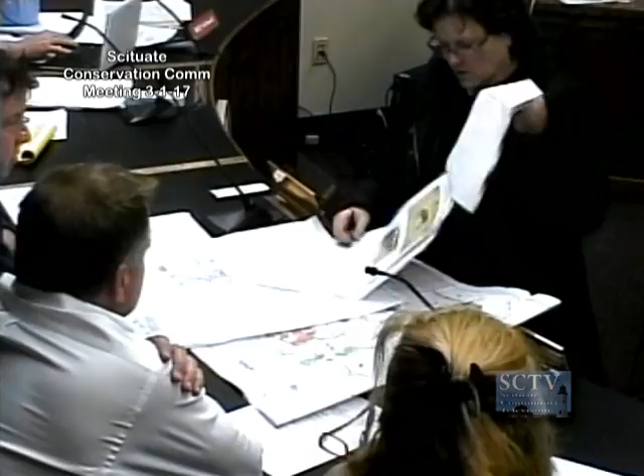What kind of fence are you thinking? It would look like a farm fence, something like this, or more simple like that. I've done this before and they're not very visible compared to other fences - you can just see the posts, and the mesh is a bit bigger, maybe about that size. It's not barbed wire, there's no electric, it's just open.

So the work that she's proposing is in between the 100 and the 50 foot line, in between the wetland and the 50. In the 50, there's a big ledge outcrop, so the house is up on top of that ledge outcrop right now, and then that goes to the back.

As Pat points out, this was a site that somebody used for dumping fill and concrete and a bunch of stuff. Are you going to eventually clean that out of there? That's what I'm hoping you approve too. I assumed that was the case, but I'm here because I want to make sure I do the right thing. If there's that debris, I'd like to be able to clean it up.

So there's no place else to put the shed, right, given the fact that it's going to be within this area on the ledge? Well, Frank, where does the ledge end on this? It sweeps down and continues back here, and it's probably all along here, and it comes up all around. So this is the house on top of ledge.

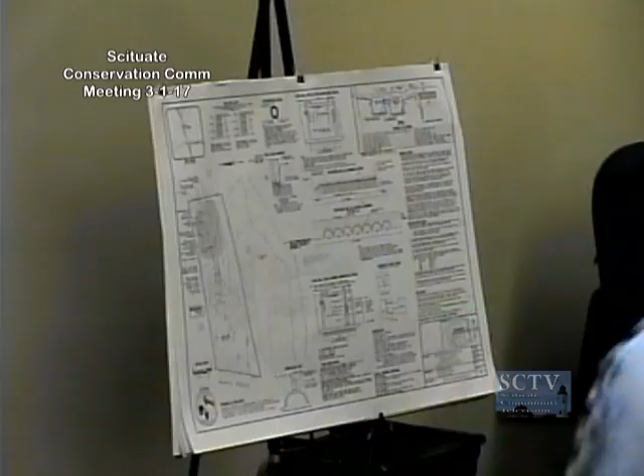This riverfront standard, 10.58, exempts septic system upgrade projects where you're not proposing an increase in flow.

I'll mention as well that river is a tributary to the town's drinking water supply. As such, per Title V, it has a 200-foot setback referred to as a Zone A. The Board of Health can waive that requirement down to a 100-foot setback in repair scenarios where systems exist within that Zone A. We've asked for that exemption.

The system is located outside of 100 feet, but it is within that 200-foot setback. Again, that's applicable under the Board of Health Title V regulations.

Wetlands Protection Act-wise, the regulations basically make a presumption that any system that's an upgrade, not associated with new flow, if located outside the 50-foot buffer zone, is presumed to protect all of the interests of the Wetlands Protection Act. That's the case that is met here.

It's outside the 50-foot buffer zone. We have appropriate erosion controls in place, and it's an upgrade with new construction standards applied.

Greg, has the Board of Health ruled on your request yet? No, it's currently under review with them. Okay, thanks. So we'd be looking for a determination pending their review.

When, yeah, right, yeah, okay.

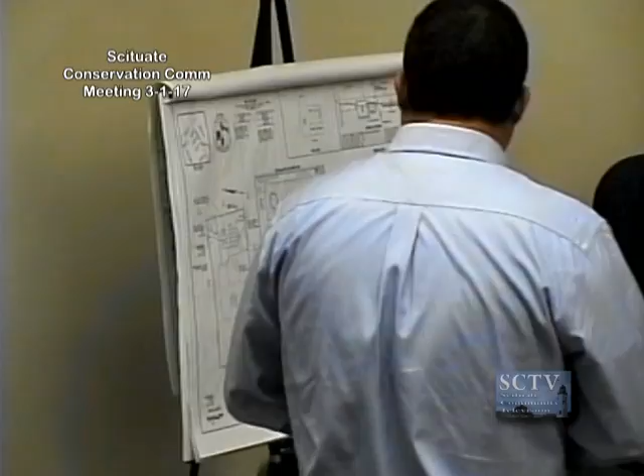We're not proposing to change the grades in this backyard. We're not affecting any flood storage capacity. We're not diverting stormwater in any direction where it doesn't currently go. Again, this is a septic system upgrade. It was an NOI because of the fact we're inside that resource area.

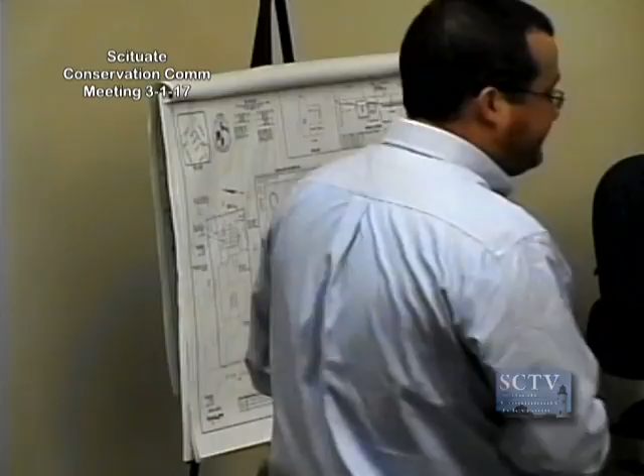Bill, you want to jump or you want to? No, what is the system that's being proposed, Greg? Just a quick overview of it.

The septic system proposed is a 1,500-gallon septic tank, a distribution box, and then a series of chambers, 4 wide by 5 long. They're plastic infiltrator chambers.

Doesn't a tank have to comply to different standards in an AE zone? Does it have to be anchored or something? In the velocity zone, it's supposed to be raised above the velocity zone if possible, or have additional weight attached to it as well.

Thank you. I'm all right. Looks good. Lisa? What size tank is in there now?

What's there now is just a cesspool. Okay, where are you with BOH on this?

Sorry, Matt. No, don't be, that was my next question. Go ahead. Oh, sorry.

It's pending their approval. As long as the grade stays the same, I don't have a problem with it.

Pat said he spoke with Jen. There were revisions to the plan, and she doesn't think there's going to be any issues. I think it's an upgrade, we should go ahead with it.

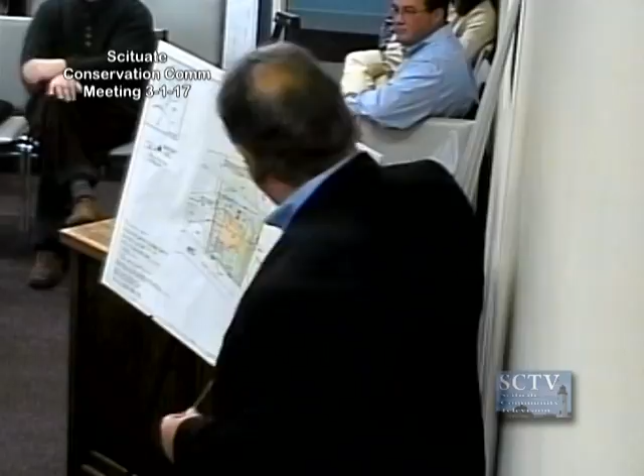This is the site plan that we submitted with the application. The yellow line represents the perimeter of the property. It is bordered by Scituate Harbor to the north.

There's a coastal bordering vegetated wetland just in from the rear of the property, shown in pink, with a 50-foot buffer and 100-foot buffer to it. The FEMA flood zone is an AE zone, elevation 15, shown as a blue line.

The portion of the main house is uphill, here is a first floor above the lower level of the house. And this is also a patio, which is below the first floor of the house, just above elevation 15 as well.

There are existing gravel driveways to the existing garages in this area, and one other gravel driveway goes all the way down into this area. These driveways will be eliminated, and it's proposed to have a garage in the front of the house, which will have some pavement, with the small circular drive as pervious surface.

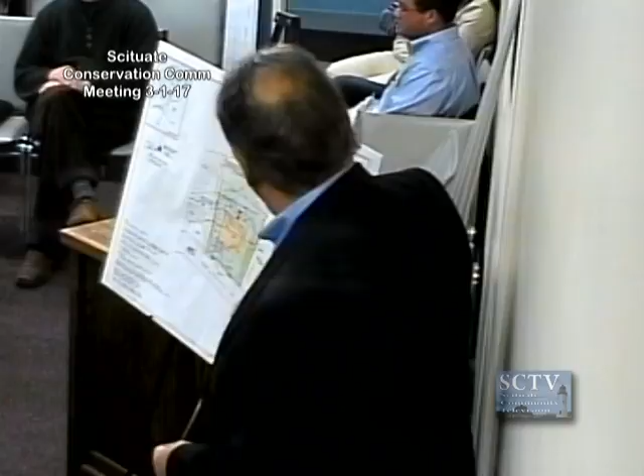In the lawn area, we're proposing a series of plantings, which we show the quantity and type of on the plan as well.

The work that's in the resource area is in land subject to coastal storm flowage. None of the work we're doing here would have any impact on this resource area, which is a bordering coastal wetland up below the salt marsh. These plantings are similar to what we put on this property when this house was newly constructed about 7 or 8 years ago.

There is no stormwater work being presented because the increase is less than 25%. I spoke to Beth this afternoon, and I've got some plans to hand out to you that explain those numbers.

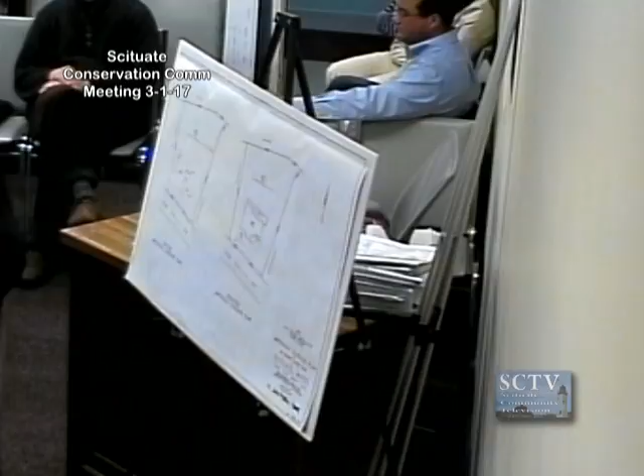There's two plans in here, one shows the... look up on that thing, Bill, what's the one? There's two plans that show the impervious coverage and the calculations we arrived at. You got one right here, too. Yeah, oh, thank you. We'll take a look at the top one, which is this one.

On the left side of the plan, we show you the impervious area. You'll notice that the gravel driveway to the right side of the house is not shown here. There were some balconies taken off because they were not impervious, and there's a gravel driveway in this area that we took off. This plan represents the impervious areas we used to calculate the existing impervious area.

This is the proposed impervious area. It shows that portion of the driveway in front of the garage, and a portion of the house that would be impervious. That number is slightly less than this one, and that's how we came up with the 24.5%.

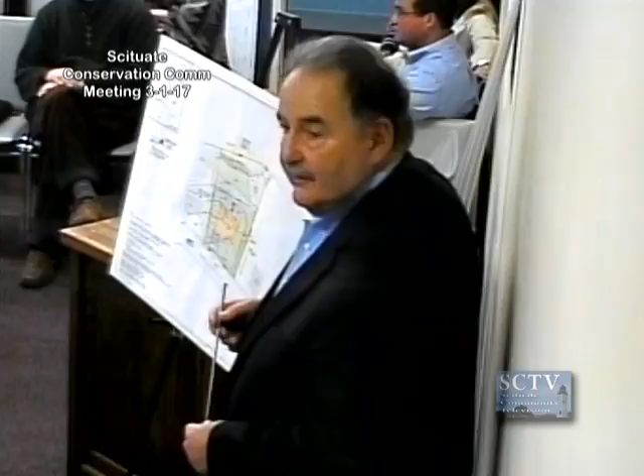That's shown as a blue area on the plan. There's a portion in front of the garage bay, and then strips going around the side - those are all pavers. Yes, and these strips will be about that wide, just for the tires, just tire tracks. Everything else will be lawn.

So, Frank, just so I have this - you can theoretically add as many pervious pavers to an area, and that still would not add to the stormwater calculation? For the stormwater calculations, they're not counted. It's a 25% increase of impervious that triggers it. So no matter how many pervious pavers you have, that still does not count as impervious.

Take the word paver away - pervious versus impervious is basically black and white. You might theorize that a 6x6 square is impervious, but the way it's installed, it's still runoff, it isn't. You know, if you have an asphalt surface or concrete surface, something totally solid, that water has to shed off of it. But with these pieces, because the water can drain down around them, it's considered pervious.

Okay, well, we're on the same subject - that's only for the stormwater calculation. Right, there's whole wetland stuff that's very different than that.

Okay, and sticking to the same subject - decks are not included as pervious surfaces? Decks that are open... I think the reason they show this area here, there's a proposed deck, but it's impervious underneath because there's a concrete patio below it. So a deck would be pervious, an open deck. It would be impervious if it had a roof, like a porch - pervious, yeah.

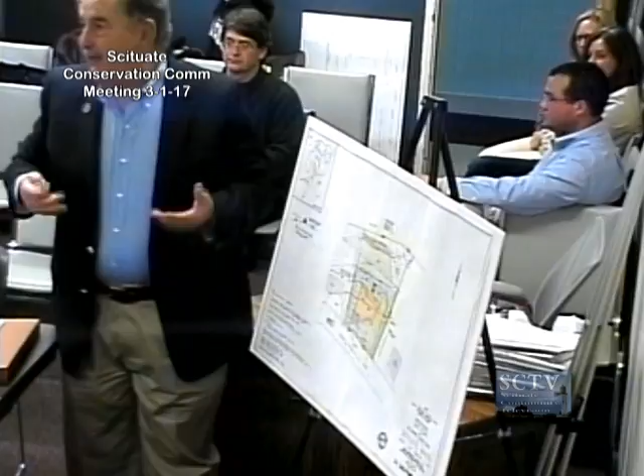This is all in the VE zone? No, no, it's in Zone X. This is X, before you even head down Edward Foster Road. You're right on the line too, Paul, with the A zone, right at the edge of the structure there. This line does not go through the house, it's going through the patio down below. But what we did was pick that lower level up, so it is above 15 for obvious reasons. This is the area he's talking about, making impervious.

Weren't we looking for FEMA to define X zones further? No, it's a different situation. It's the LiMWA, and there may be a LiMWA at the base of this property.

And I believe the applicant said you don't have a problem with the cobbles where the driveway is? That's fine, pavers. And just for the record, pavers - you're William G. McKelvey, correct? Pavers, yes. Okay, that'd be helpful.

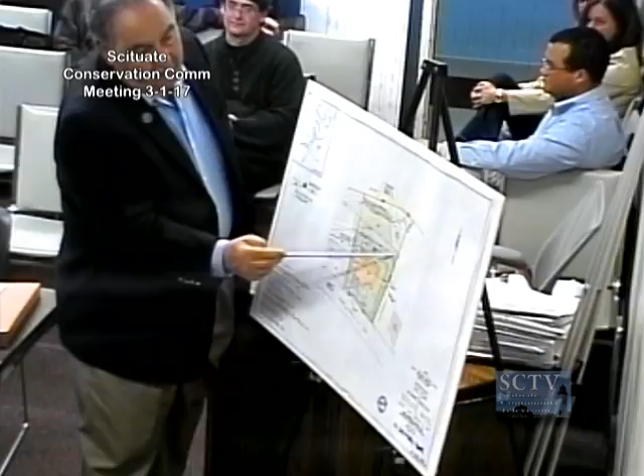Can you show where they're getting rid of the 50-foot concrete buffer here, and putting in the lawn, going permeable pavers down to the salt marsh, the whole thing? This is the resource area, which is actually in the line. This is a 50-foot buffer. The second page line is a 100-foot buffer from here.

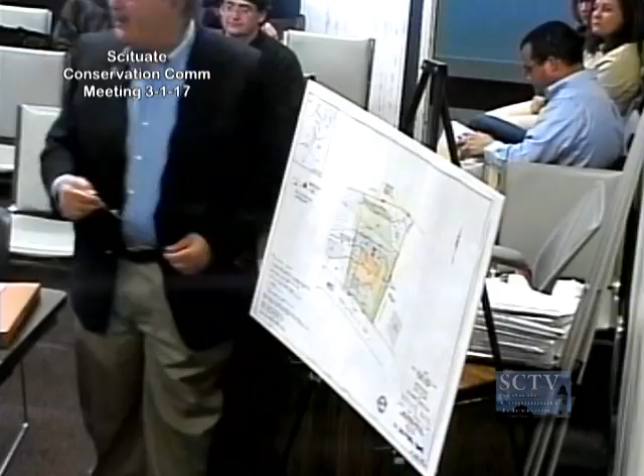So you're showing absolutely no work in the 50? None, zero - to the 50, yeah, there's a small corner of pavers, which is why I asked for the pavers on the other side. This is all maintained lawn at the present time, and has been for decades. This was the former property of Minnie and Doherty, and their son was there - they sold and moved out of state.

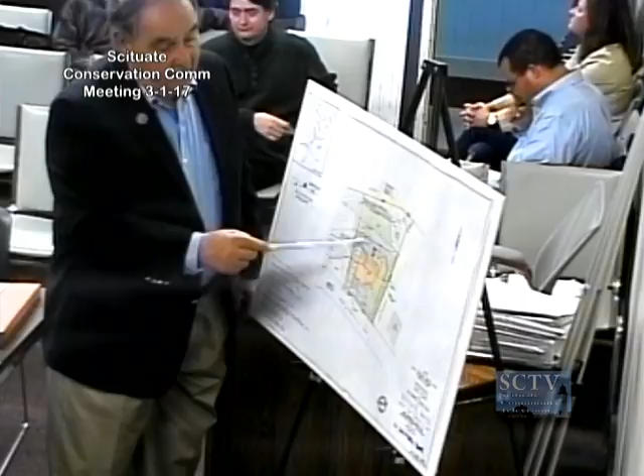So the two areas of proposed permeable pavers, you said cars are going on top of those? If you drive down here, he can park the cars here if he does work - pull in, drive in like it was a basement. If it were lawn area, it'd just get dug up and you'd have erosion problems going down. So pervious pavers will stabilize the soil and let the water go through it, without causing erosion problems. Okay, thank you.

If the impervious driveway is going to be replaced with pavers - yeah, it's all pervious pavers. That's a good start, I think. Paul, you could just give us the calculations on changing that area from impervious to pervious, right?

Is the town floodplain district at the far edge of that property there? It's a 10-foot contour, which is down here, near the silt sock line. So there's a silt sock here, just to stay away from, but we're not doing any work there, no grading or anything. The one thing is, there's proposed plantings out there, and we're all for proposed plantings, we'd have to run that by zoning to make sure that's the right type. Really?

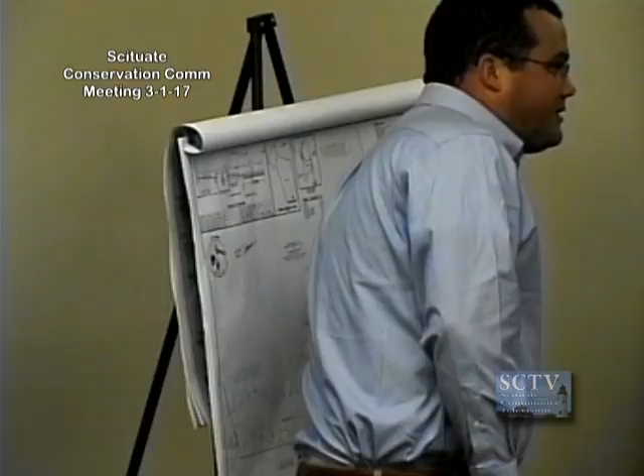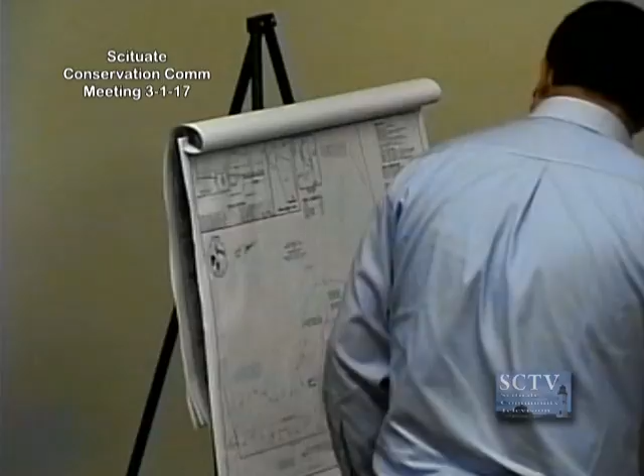It does not come onto the property. Further back, that brook expands. At that expansion location, the map references the 100-foot contour with respect to mean sea level. Our elevations here are all with respect to mean sea level. The lowest elevation at our site, which we shot, was elevation 108 in this lower corner. We're out of it with respect to the distance to the culvert as well as elevationally, as confirmed by Mr. Duggan.

So none of these parameters you described change given the fact that we're dealing with a tributary? No, a tributary is not regulated in the floodplain and watershed protection district. The tributary is referenced in the water resource protection district.

Thank you very much. Richard? I'll move on for now. No questions. Lisa?

These different setbacks you're referencing qualify this as one lot, correct? Okay. So if you were to come back and revisit us for lot two, okay, very good, reanalyze. Yes, thank you. Matt? I don't have anything.

Pat? I think at this point there's a couple of things we need to verify. When the Board of Health makes their review on the septic system, if they change the location at all, that could change the distance of the tributary. So we want to make sure that anything to do with septic stays 200 feet from the tributary, under Mass DEP and Title V. They're not done with their review. I talked to Greg about going out and taking a tape, and these things are really tight, like 201 feet from the tributary. So we need to check it once the septic location is finalized. I assume Board of Health is getting close on that.

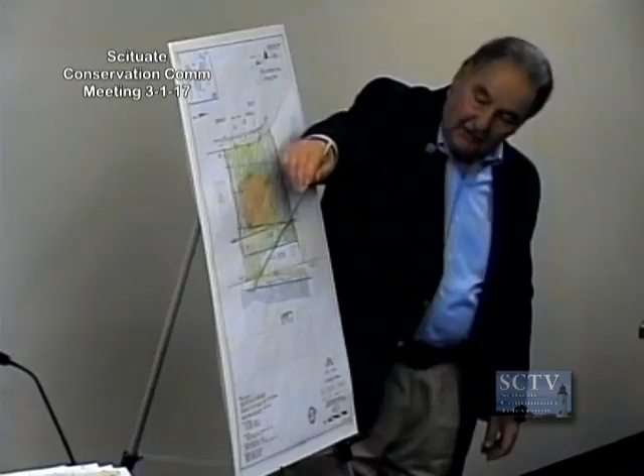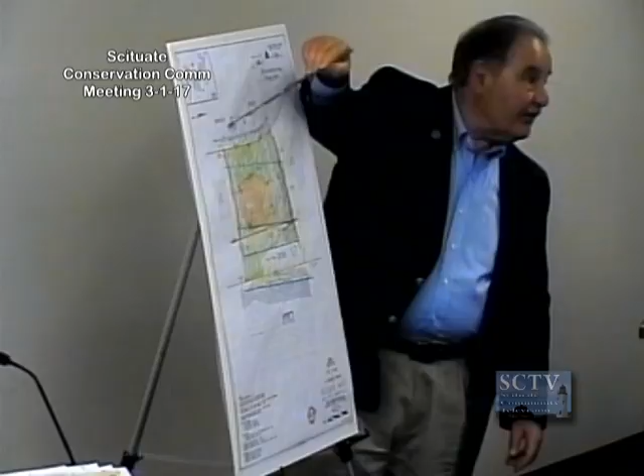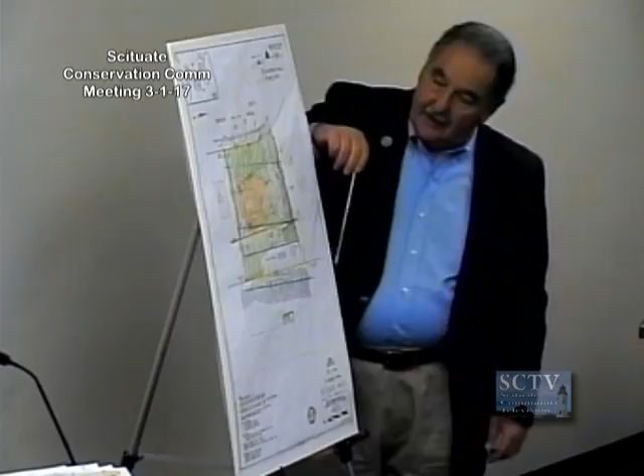On this proposal, we would keep the existing driveway that's shown in this area here. It actually goes all the way to the edge of the lawn, but this portion of the driveway would be eliminated. There'd be a small retaining wall to contain the grading of the lot in this location. And the house would be built closer to the street, further away from the 50-foot buffer zone than it is at the present time.

This dashed line here is the overhang on the rear of the house, and this is the proposed location in this area here. So we're going to pull it forward about 4 or 5 feet in this area here.

Just to interrupt for a second, do you have one of those plans where you can show the existing and proposed? It's hard to tell from these plans where you overlay it, for me anyway, I don't know if it is for the rest of the commission. Yep, I'll let them get to that, I'll show it to you in a moment.

This is the only regrading of the site, down here at the end of the wall. We're gonna build a wall up here and add about a foot of fill against it, so you don't have a 3-foot drop off the end of it. There'll be a grass swale along the edge of the property to let the water go into this area here.

If you notice, this is the edge of the lawn. There are some photographs showing what happens, there's some overwash. Small stone washes up from the beach in storms and it's all been deposited here. So the water goes down to the stone and eventually into the riprap.

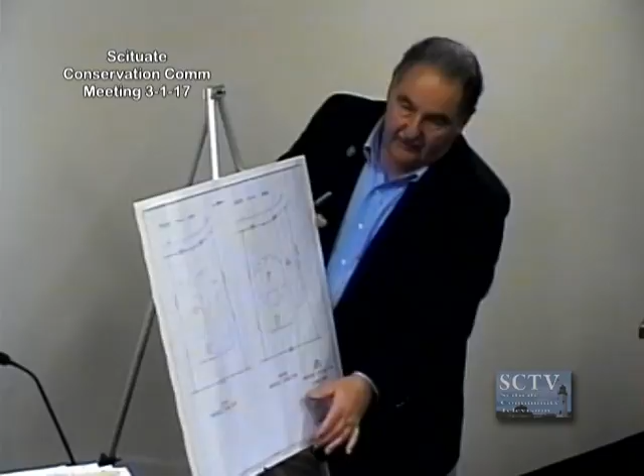The plan I prepared, I didn't do the overlay. There isn't much of a difference in the... I take that back. This I did for the numbers.

We have a 24.2% increase in impervious area. In the existing site, the impervious area was the driveway, which is paved, some sidewalks here, and then the existing house. That's a total of 2,909 square feet.

In the proposed condition, we're going to keep the same driveway. We're going to pull this part back, and then we have the house in this area here. This is a total of 3,614 square feet. Again, if we don't do stormwater, we're allowed a 25% increase in this number, so if you multiply this by 1.25 you come out with 3,636 square feet. The proposed is 3,614, so we're about 22 square feet under the 25%.

Is that a pathway that goes up from the back of the house? Yeah, that right there, yep, it's a sidewalk coming in from the street. Oh, that's another sidewalk, there's a sidewalk here. Is the sidewalk coming from the street paved or impervious? Here? Yes, this is. Okay.

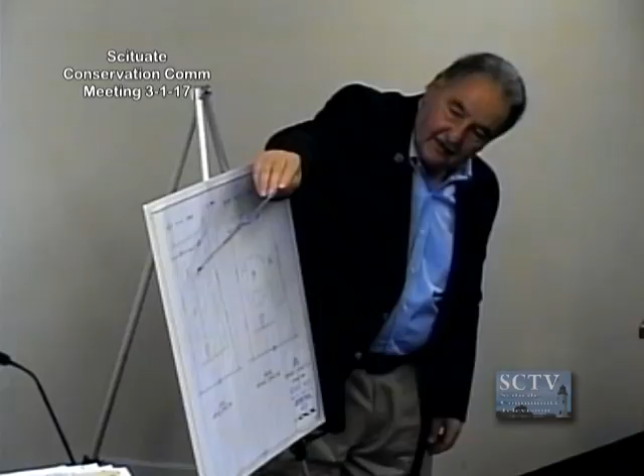These are stone steps, granite steps. Okay. Again, this is all based upon an on-the-ground field survey, which is required.

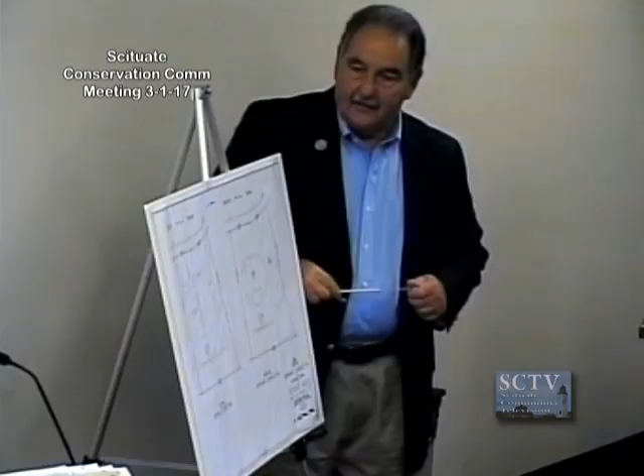So the project's straightforward. There's very little regrading because we were able to keep the driveway where it is, with the exception of the rear portion where we had to put a wall in to contain the grade, which is in this area right here. We're going to keep these grades here because the proposed house will fit into the existing grade similar to how the existing house does. This is on the side of the hill, and trying to do anything under that would be expensive because you'd have to regrade the whole site.